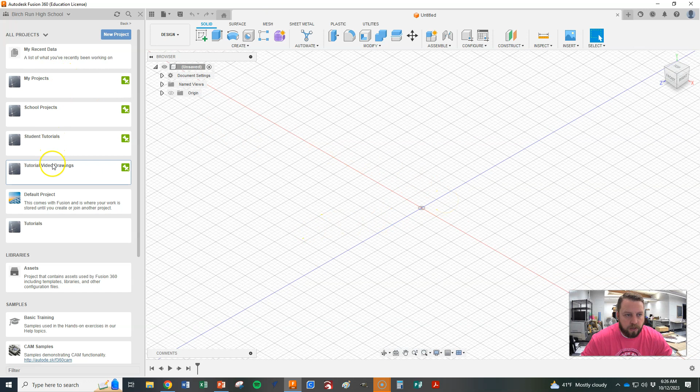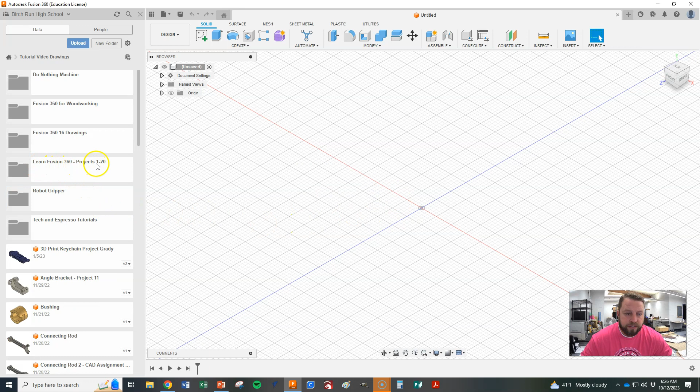We've already got projects going, so you don't have to create a new project, but I would recommend creating a new folder. I already did that, so I clicked on New Folder, and then you get this option right here. Now, I don't really need that, so I'm going to get rid of it. When I created my new folder, I titled it Learn Fusion 360 Projects 1 through 20. I double-click that, and mine's empty right now.

We'll start saving in this and building from here, and this is where I'm going to keep everything. Right now this says Untitled. First thing I'm going to do is go ahead and title this and save it right now. I'm going to call it Project 1, Fixture, Grady. And that should pop up right over here. Then I can just keep updating it as I continue drawing.

So let's head back to this and take a look here. What you have to ask yourself is, in which view am I going to start drawing this? Which plane, and which shape is going to give me the most information, make this the easiest to do? If I'm looking at this top view, yeah, it helps, but really in this front view, this L right here is probably what gives me the most indication about this part. So my goal is going to be to draw this L, extrude it out that way, and then add this angle support in there later along with the hole.

This is really what I need right here. It's 4 down, 5 over, 0.75, and we'll draw this in two different ways to get through this, give you a couple different options.

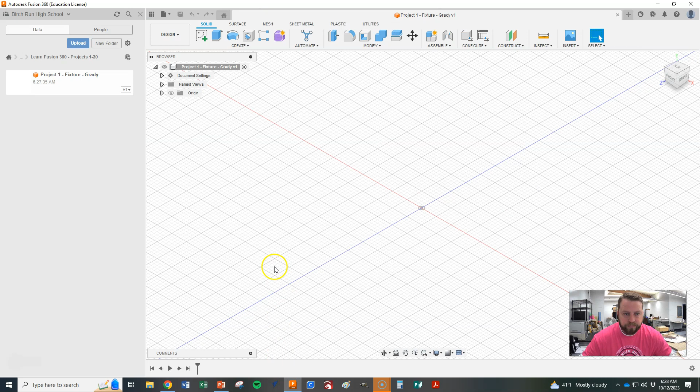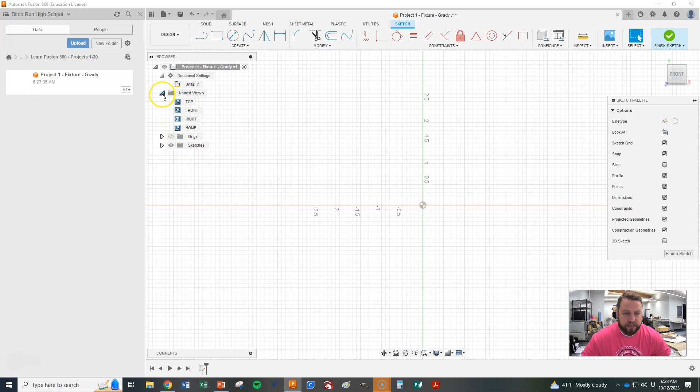First of all, we know that we need to create a new sketch and we want it in the front plane. So let's go ahead and click on that one right there, and it takes me over to the front. This is a good time to check my document settings, make sure I'm in inches. You can open that up if you want to see the top, front, all that kind of good stuff. Here's my planes, what you're drawing in, and things like that.

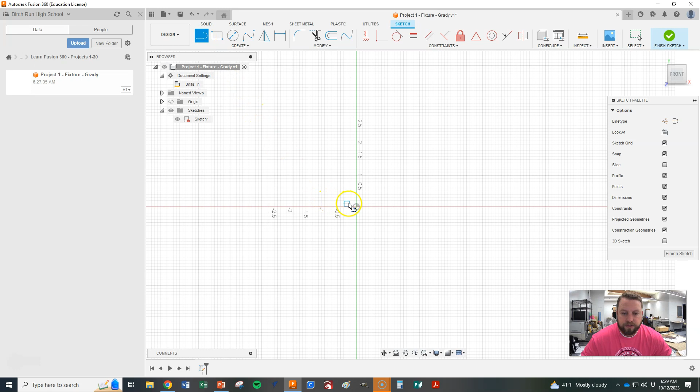Sketches, I've now created my first sketch. So what we're going to do for the origin is I'm going to make this corner on the origin point, and I'm going to go down here, all that good stuff. So here's one way to do that. Just grab a line, start in the center, and drag it out anywhere, making sure that I get this symbol right here, that flat symbol. What that means is horizontal. And then I want this one square to that.

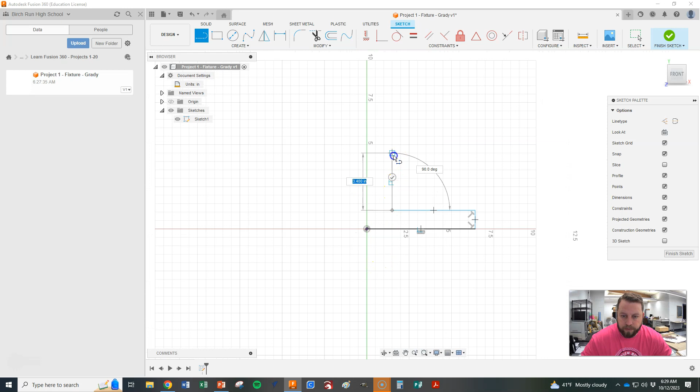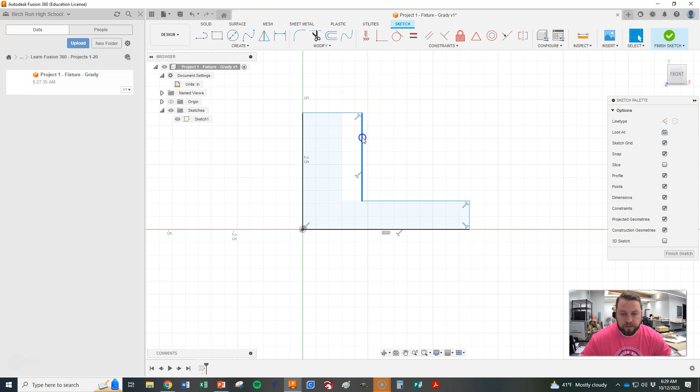Come back, up, and now this one I want to make sure it's right over top of this. So I'm just hovering, not clicking on the origin yet. Hovering to kind of wake that up, clicking there, and clicking there. So we want to then start dimensioning this. Right now, when it's blue like this, it means that your lines are undefined. If I hit escape on my keyboard and get to this arrow, everything can be moved.

I can't move much of this because I'm stuck in my 90 degrees the way I want to be, but you can see that everything is pretty flexible still. So we're going to start hitting D on our keyboard, and it gets to this dimension tool. I've already had some stuff selected. Let's start right here. We want this to be 5. Enter. This to be 4. Enter. So my height's 4, my kind of width there is 5.

So this would be 0.75. It only gives this one dimension saying that it needs to be the same. From here to here is 0.75, and since they don't give you this one, this also needs to be 0.75. So really I want this line and this line to be equal.

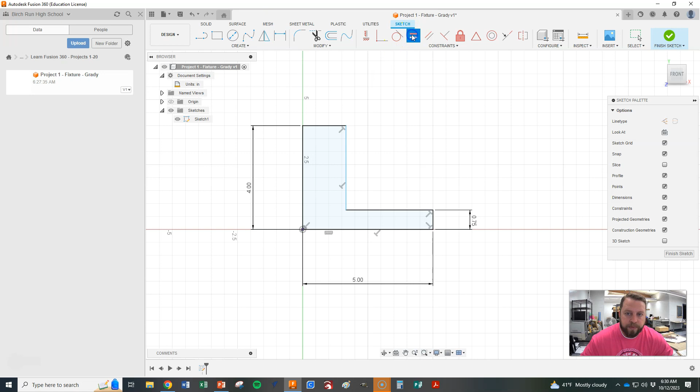So we're going to try a different constraint tool you guys maybe haven't used yet. I'm going to hit equal, and I want this line and this line. You can see that equal sign pop up, which means those are going to stay the same. If I were to change this, let's say to 0.25, you can see it changes this one too. That's the beauty of the equal constraint.

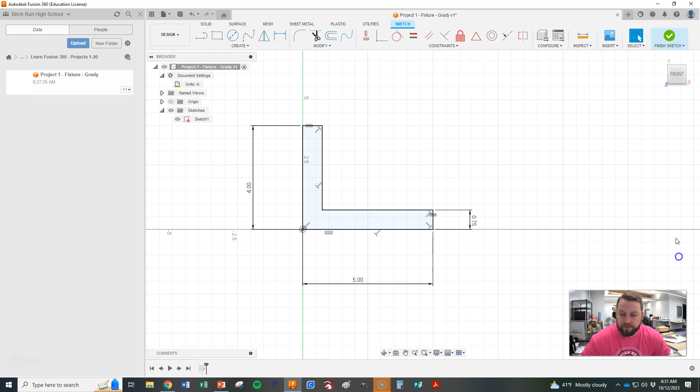Now, just by locking this in there, everything turned black on me and everything's locked in. I can't move anything, which means everything in this sketch is fully defined, exactly how we want it. So we're going to finish this sketch and go to a home view.

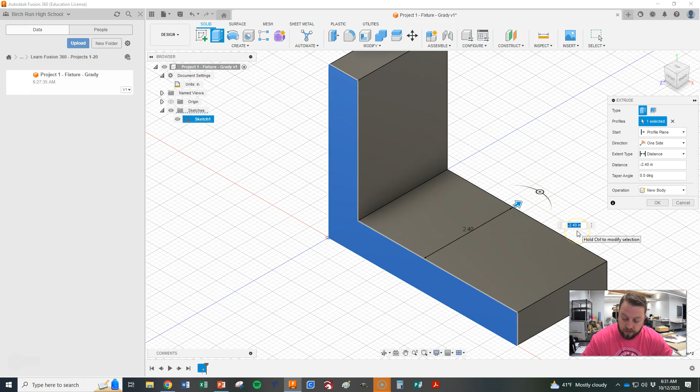Now we're going to see how far do I pull this across. I go 5 inches back, and we'll hit extrude, which is E on the keyboard. It automatically selects the surface because there's only one profile. I want to show it which direction I want to go, so I need to hit -5, and then I'm going to hit enter.

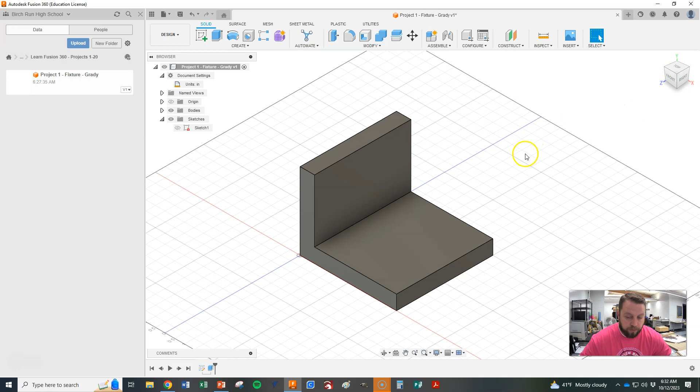So what we're going to do now is push shift on the keyboard and push in on the scroll wheel, and it will allow me to orbit to the back. That's one way to do it. I could also just click on my orbiting cube up here, and that will work for us for now.

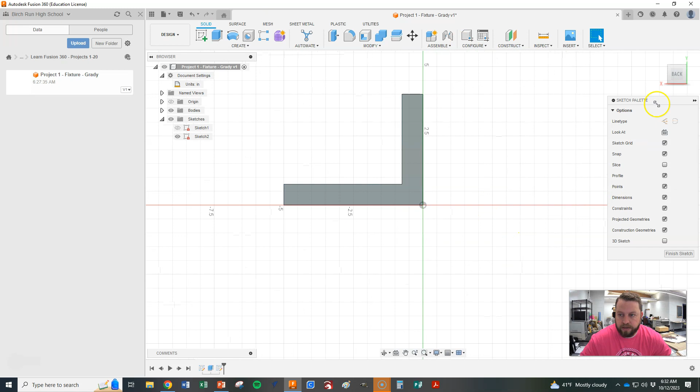Then what we want to do is create a new sketch right on this surface, and it whips me around, and I should be in the back view now. Very easily, all we have to do is click on that point and that point, and this should turn shaded, like a little light blue here, like it is there.

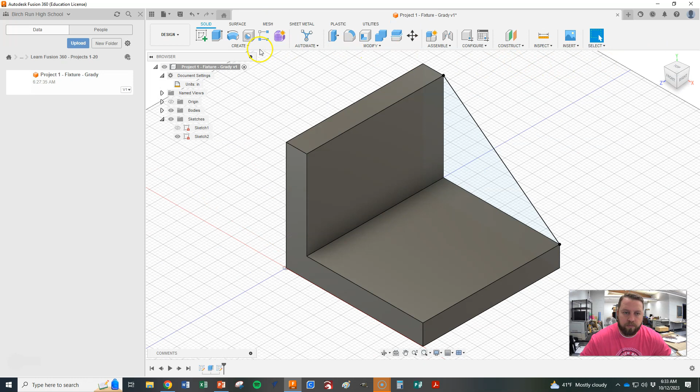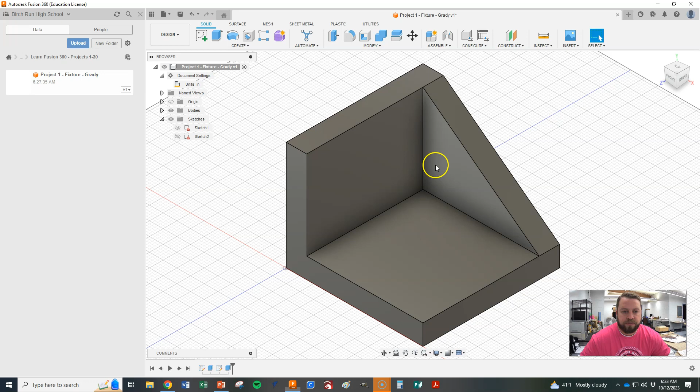If you want to, now's not a bad time to save. We'll just call it midway through. You don't have to title it anything if you don't want to when you save, but you can see it updates with what my part looks like, just to make sure nothing happens to it.

But I guess the thing I would warn you about is that eventually we're going to get rid of this corner, so we're not going to want a dimension to the corner. We want a dimension from this line and this line, not the actual corner point, because we're going to lose that.

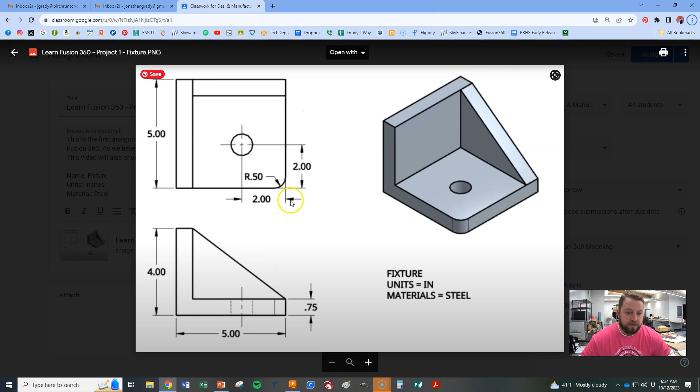And then our hole, does it say where the hole measurement is? It does not, so I'm going to add that. I'm going to go back to the video I've created these from, and we're going to figure that out. I went ahead and replaced this drawing, so you guys hopefully will never even notice, when you open up this image, it'll show this right off the bat. So we've got this fixed now, and it's saying that that is a 1-inch diameter hole.

Okay, so let's go back to our part here. Hold on just a second.

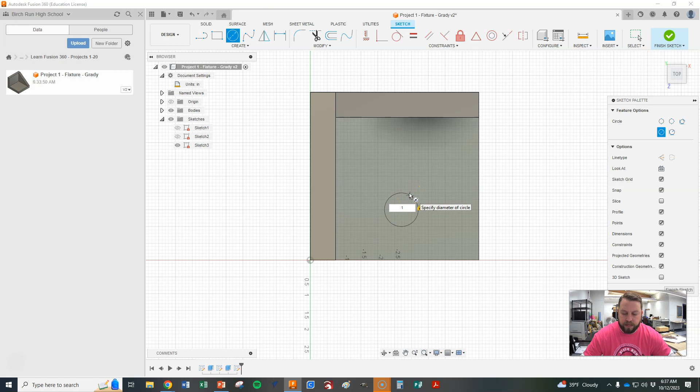The easiest way to do that now is to create a new sketch on this surface. We're going to hit Create Sketch, and we know we're going to need a circle, a center point circle. For now I'm just going to put that in anywhere, and I'm going to hit 1 and enter.

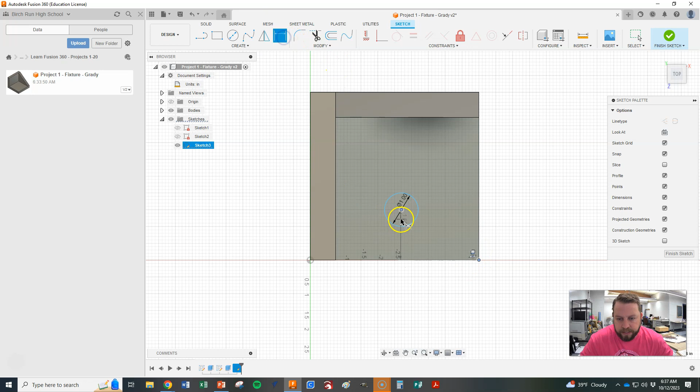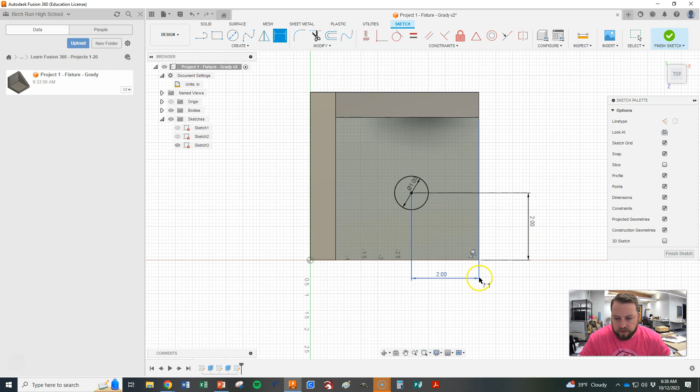Now we can get our dimension tool by hitting D on the keyboard. Here's what I was talking about: you could dimension to this point, but once we make this radius and round this off, you're going to lose this point. So we want to dimension from here to here instead, bring it down, and we know we want that to be 2, enter. Then from here to here, the line not the point, 2, enter. Now we've got that where we want it, with those 2 dimensions on there, and the hole circle right here.

I could also add this radius right now using the fillet tool, and then extrude that down through there, but we're going to do that a different way. So we're going to hit Finish Sketch. Obviously that one stayed visible for us, which is good.

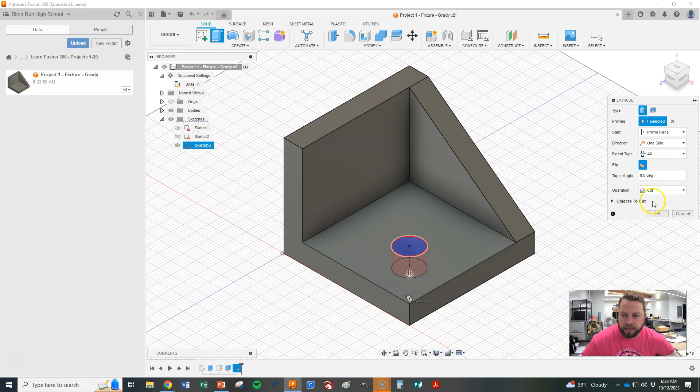We want to extrude this hole now. I'm going to steer it down, and instead of distance, I'm going to put through all. I'm cutting it out, which is what I want to do. I'll hit OK, and now our hole is there.

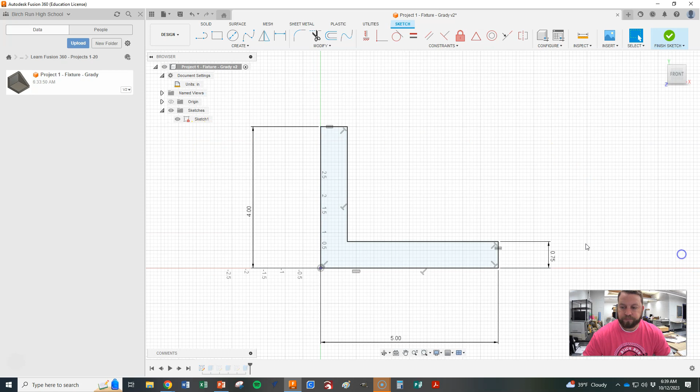Now let's add this little radius, a 0.5 radius, called a fillet, on this front corner. We could have done that on that sketch, going back to sketch 3 here, adding a fillet there and then extruding that out. That would have been a fine way to go. But once you're in the solid tools, once things are extruded, there's also this fillet tool that makes things very easy.

When you click that, this little window pops up, and it asks which edges, faces, or features you want to fillet. We want to fillet this little edge right here. I'm going to drag it in so I know what I want it to look like, then type 0.5 for that radius, and that looks right. Leave all that other stuff alone, and hit OK.

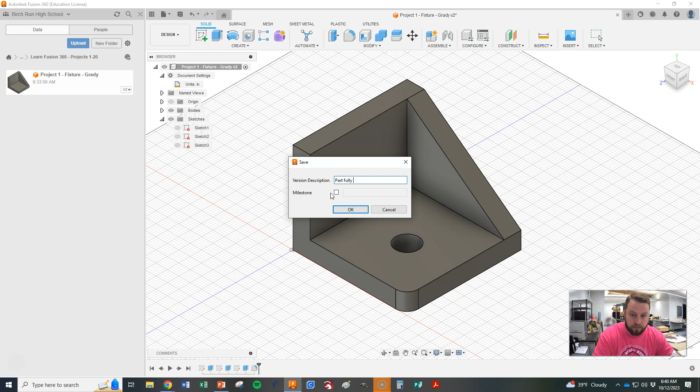Now you can see that your part is complete, right? We have that drawing done. Again, you don't have to do this if you don't want, I just like to do it to stay organized.

The only thing we need to do is assign materials, steel, before we turn it in. With all this showing, let's hit this arrow for bodies. We've only got one body, which is this whole part. We're going to right click on body, and what we want to do is assign it a physical material. I right clicked it, then left clicked on physical material, and I'll move my face out of the way. We've got some options over here.

This is all your options, probably what it looks like for you when you first open it. If this does not look like this, maybe change the library so you can get it like that. Then what we want to do is click on metal, which brings down a whole big folder of metals, and we want just normal, plain old steel, so we're going to go through the stainless right there.

Then my little hand shows up, right? I'm going to hold it with a left click, drag it onto my object, then release. Now this has been turned into steel. We've assigned it a physical material.

To check that we did that correctly, we go back and right click it, then open up our properties window. In this properties window, we see now that the physical material is steel. Great, and we've got some other things going on. We see the area, density, mass, all that can now be calculated by giving it this physical material.

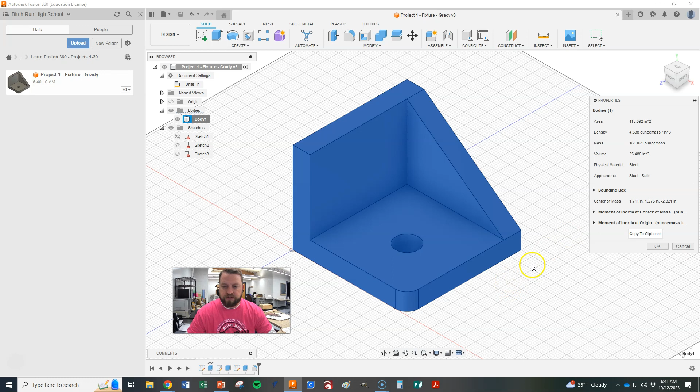And so this is what you're going to turn in. I just clicked off of this object so that it wasn't blue, but it doesn't matter if you leave it blue, that's okay.

But then we're going to go back to our snipping tool. If yours isn't pinned to your taskbar, you can go down here and open up your snipping tool that way. And we want to create a new screenshot, so I'm going to do the full screen here.

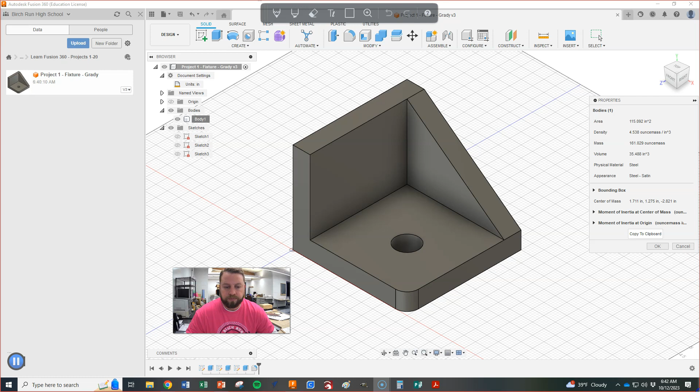Then we go File, Save As, and let's put it in our downloads. This was called Learn Fusion 360 Project 1, Fixture Grady. You can title it something else, but I do recommend, since we're going to do 20 of these, starting to label them something that you can stay organized with. So I'm going to save that to my downloads, and I can close out my snipping tool.